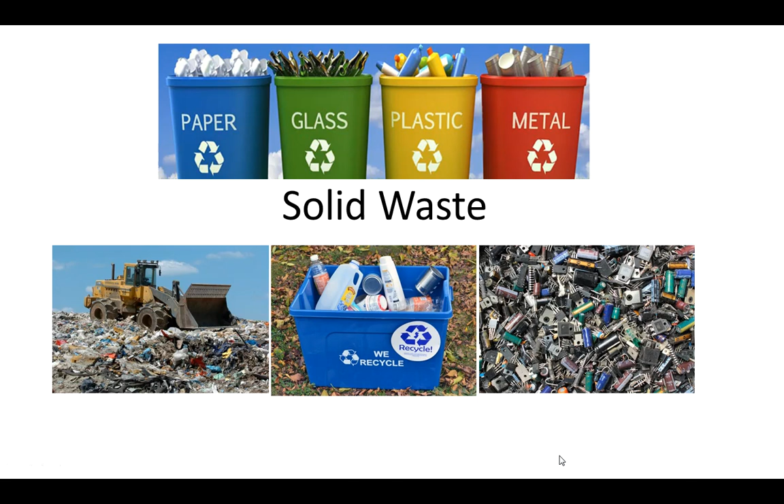So today we're going to talk about solid waste, and there are all kinds of municipal solid waste that we're going to talk about. So let's just get right into it. So there's industrial solid waste, obviously coming from industry, and that can come from all kinds of stuff. So whether it's manufacturing industry or mining or farms, there's all kinds of waste that comes from anything that you do, really. There's municipal solid waste, so that's trash like household, school, office trash.

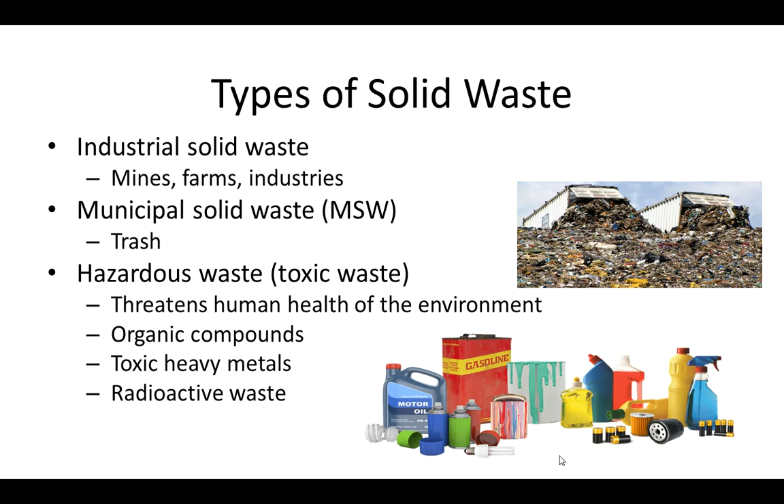And then hazardous waste, which we'll talk about later, but hazardous waste is pretty toxic, and it can affect human health. And there are all kinds of stuff that's in there, and we will talk about that in a different PowerPoint. So most wastes are produced by developed countries.

So the U.S. has lots of trash, and so we produce about 258 million tons of municipal solid waste per year. And so while we do recycle 89 million tons, that's a lot left over. So, do the math if you want some practice. Ha ha ha. Anyway,

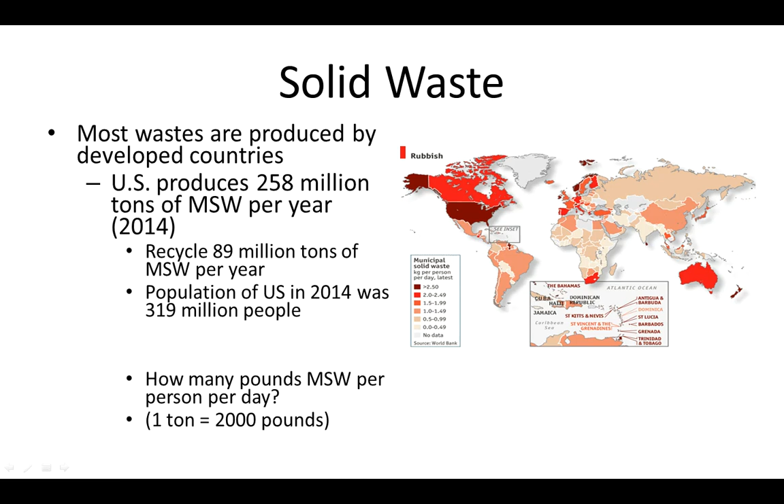so for 319 million people, we produce that much trash. So how many pounds of trash per person? Again, you can do the math. So here's a little math interlude if you so wish to take it. But I'm going to move forward for the sake of this video.

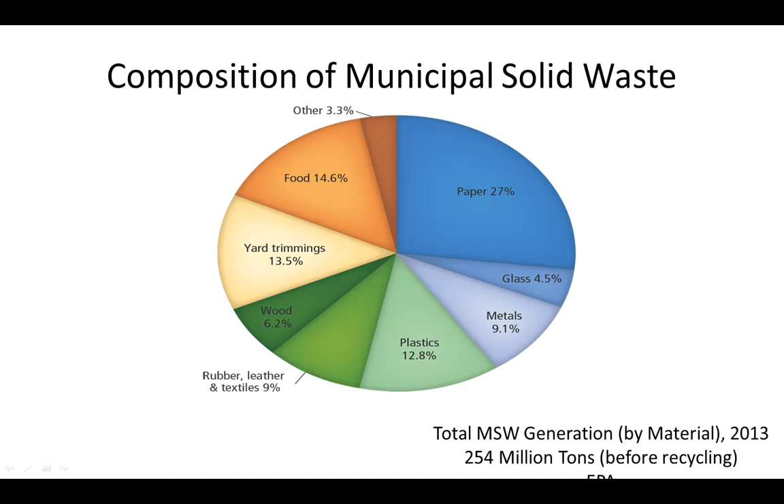What makes up municipal solid waste? So a lot of it is paper, which is recyclable, glass, metal, plastic, also recyclable. There's a lot of food waste that's in our trash, yard trimmings, wood, and then rubber, leather, textiles. We'll talk about textiles more later. But the majority of it is paper and food.

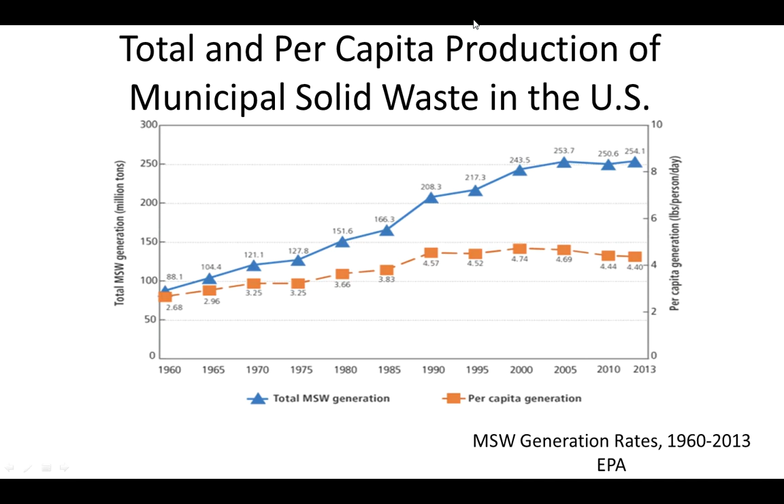And so, we have definitely increased the amount of trash that we've generated over the years. But if you look at the difference between how much trash we're generating and how much trash each person is generating, you can see that that really has to do with our increase in population and not really our increase in how much trash we're throwing away.

And so, how do we get rid of the solid waste? Really, beyond just tossing it in the garbage can, where is it going after that? And so, we can bury it, we can burn it, we can reuse it, or we could produce less, which, of course, is the best way to get rid of solid waste, to not have it in the first place. But when we do have it, let's talk about how we manage that.

We want to reduce how much harm that would cause us. If we just toss trash in our backyard, there's all kinds of issues that would come along with that. And so we're looking at the terms. Waste management is talking about what are we doing with that waste, but not really reducing the amount. Whereas waste reduction, we're focusing on actually reducing the amount of waste that we put into the stream.

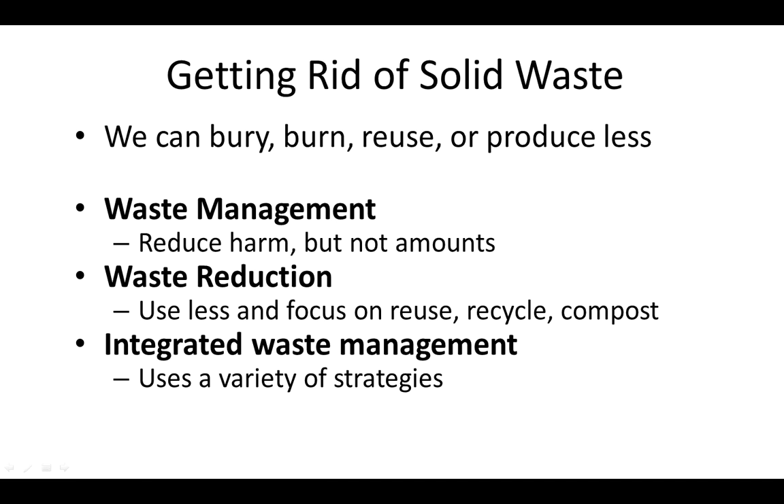And then finally, integrated waste management can use a different variety of strategies between management and reduction. And so there are all different kinds of components to integrated waste management. So obviously you have processing and manufacturing that will give us different kinds of waste. So all the different kinds of waste that we have: garden, paper, cans, mixed waste, hazardous waste, and all of those are dealt with accordingly.

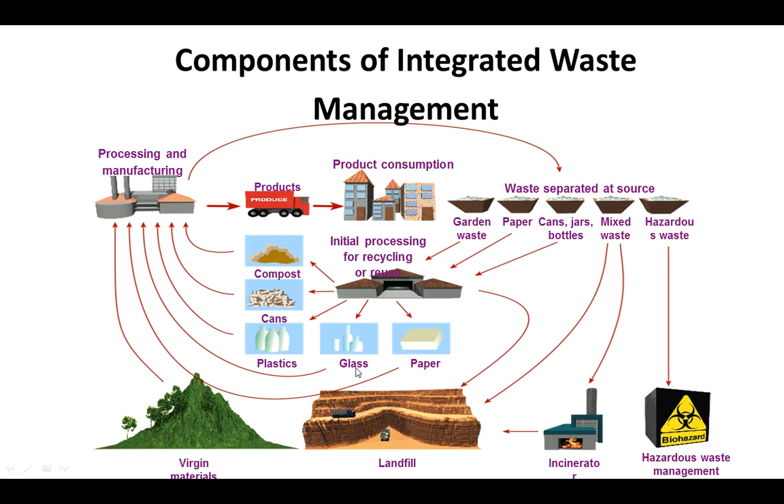And so, this would be kind of a closed cycle of waste management to kind of integrate the waste that we're producing and use it in a certain way that will bring it back into the manufacturing cycle again.

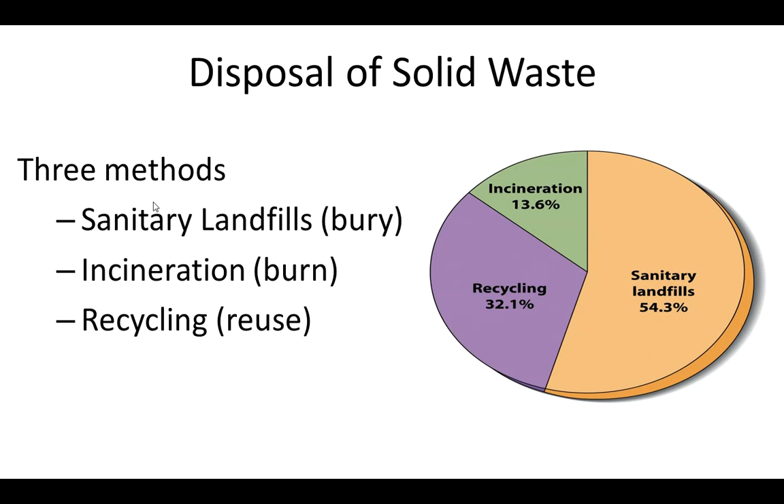So, beyond integrated waste management, we have solid waste, and there are 3 different ways that we can deal with solid waste. You can go through landfills, recycling, and incineration. And so we can bury, burn, or reuse it. And we're going to focus in on landfills right now.

And so landfills are really compacting and burying waste under a shallow layer of soil. And so we put soil over it for many reasons. A lot of it is to keep the rodents and the birds out of it, try and reduce the wind from picking up garbage and carrying it away. And this is the most common method of disposal. That's what we use here in Stamford, unfortunately.

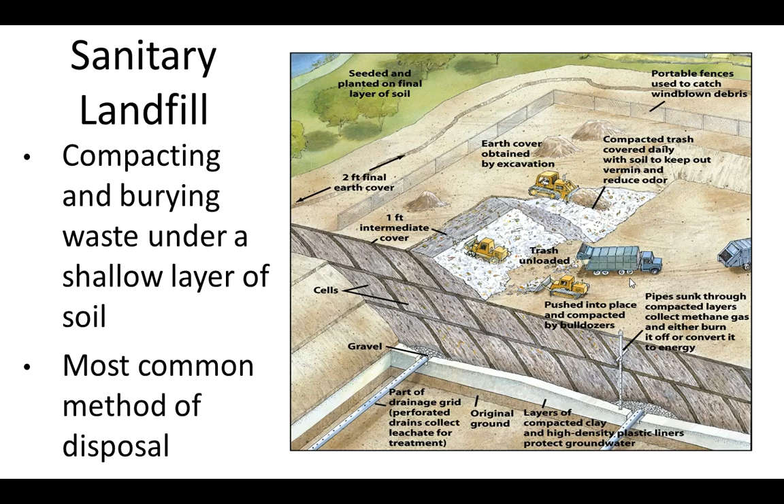So, as a landfill is actually built, it is done in a very specific way. So you can see the groundwater is here, and then what they do is they put a layer of clay down at the bottom, or some kind of impervious surface, so that all of this leachate, so the nasty garbage drippings that drip down to the bottom, don't actually contaminate the groundwater. They try and contain that in this pit here.

Then they layer it with all kinds of stuff. So as you can see down here, you have the subsoil with the groundwater beneath it. Like I said, clay or some other sort of impervious liner, sand, another liner, more sand, and then garbage on top of it. Remember, sand has a very high infiltration rate.

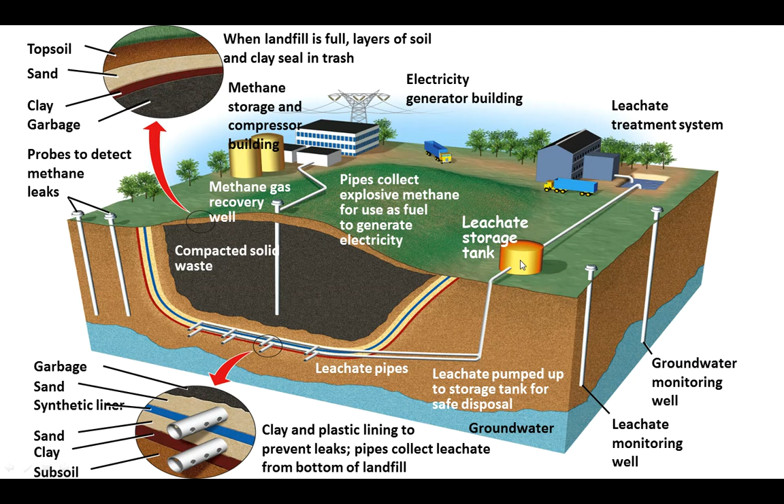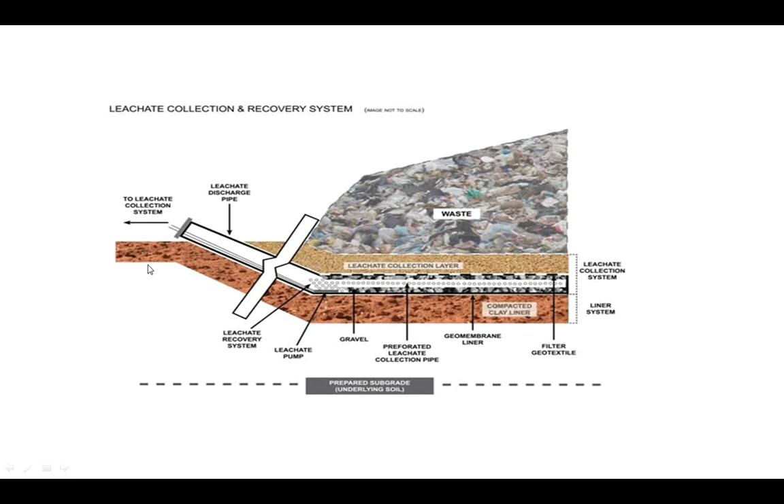So within these sand layers, you actually have these tubes with holes in them to collect the leachate. The leachate will then be collected, dripped down, pumped up to a storage tank, and then treated up here. And here is yet another picture to look at leachate collection and recovery. So again, the leachate collection layer, you have sand with the pipe, and then it gets pumped up to a treatment system.

And there are all kinds of problems that come along with landfills. And so you produce methane gas, like I said, produced by the bacteria that are breaking down that garbage. And it can be very volatile, it's very flammable. And so we need to collect that somehow. And if we collect it, we can actually then burn it to turn some turbines and generate electricity. So that's actually not a bad thing, but it'd be better if we didn't have the methane in the first place.

The surface and groundwater can get contaminated by leachate, so those liners and the cap after a landfill is done can somehow get compromised and possibly leach into the surface water and the groundwater.

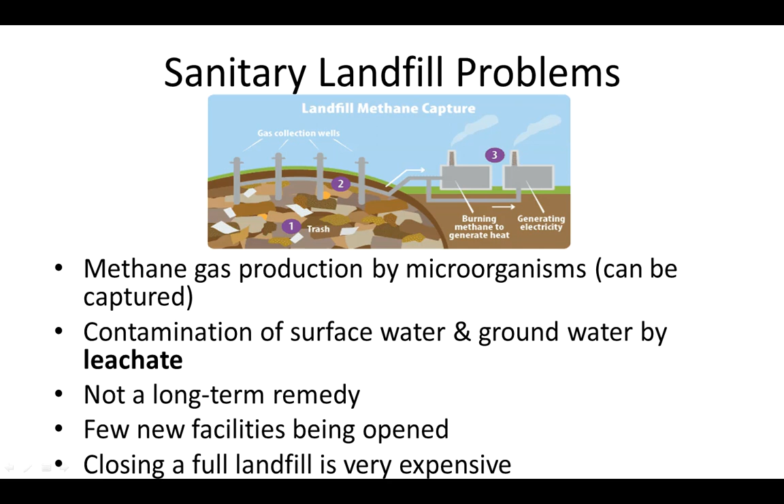Landfills aren't a long-term remedy for our trash, because at some point they're going to get full and we're going to keep on producing trash. And so we need to keep opening facilities. And closing a landfill is very expensive, because ultimately you need to ensure the stability and environmental impact is positive. And so, once the landfill is closed, you can then do other things with the land, but not much.